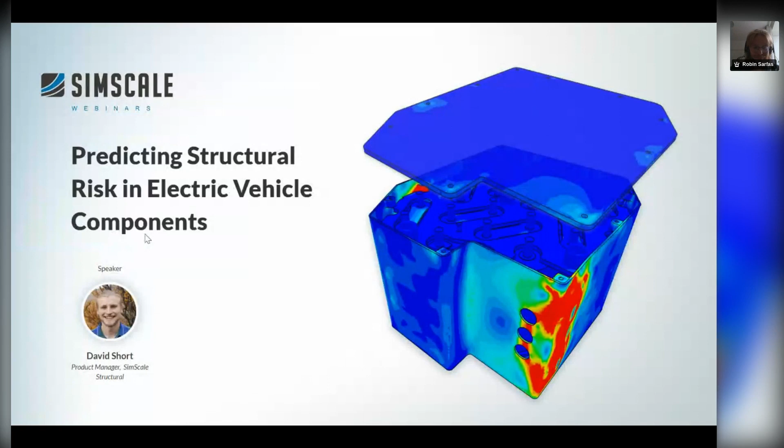Thanks so much, Robin, and welcome everybody. As Robin mentioned, I'm the product manager of SimScale. I'm hoping a number of you already know SimScale, and you'll be getting to know a few particular applications that we're really focusing on at the moment in the electric vehicle industry. For those of you who are new to SimScale, I'll also introduce SimScale, the main concept, and then we'll see the focus of today's webinar.

So today's webinar, we are going to be looking at predicting structural risk in EV components.

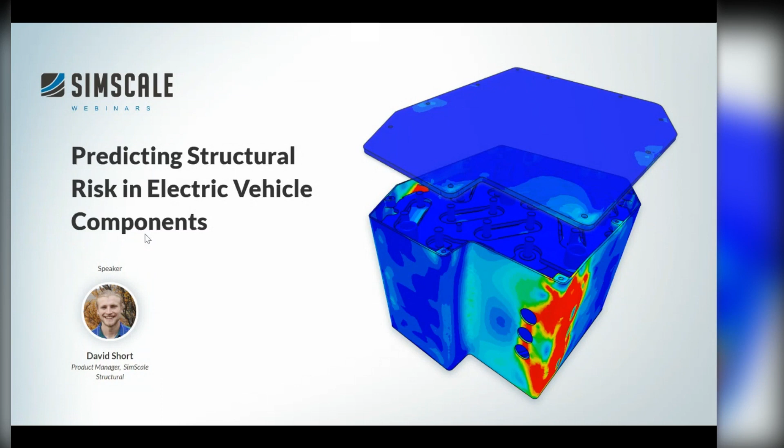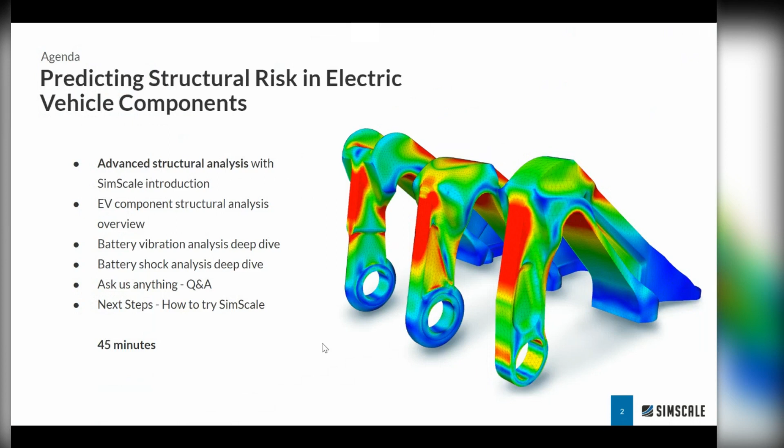In terms of an agenda, we will first look at advanced structural analysis with SimScale. That's really what we're focusing on here, and then we'll get into some specific industry relevant applications, and we'll do a deep dive into battery vibration and shock analysis using cloud native parallel computational finite element analysis. If you do have any questions at any point, please do type them into the question chat, and Robin will ask me the questions at the end. So please reach out if you have any questions or comments to discuss.

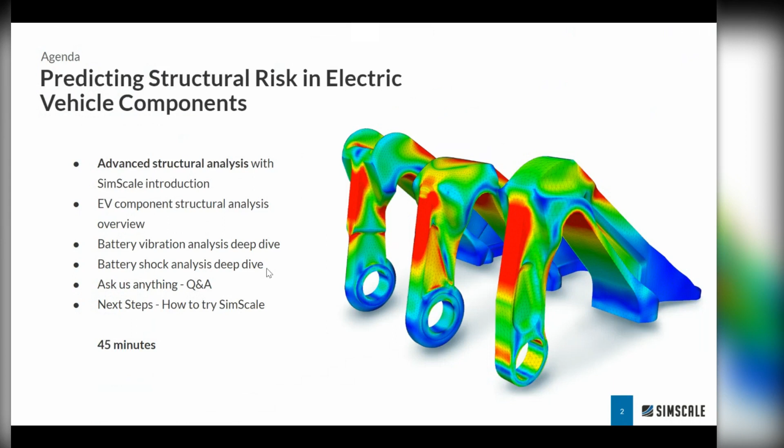SimScale is all about making advanced structural analysis truly accessible. The way we do that is we provide a 100% cloud native simulation platform. That means it's web browser based, and everything you're doing in terms of the simulation computation is running in remote servers. That means we are not connected to your local hardware in any way, and it means you can scale your simulations both in terms of the number of simulations you want to run in parallel, and the size of the models that you want to run as well.

So for a smaller mesh, we'll be running on a smaller machine, and for a larger mesh and a more complex case, for example a dynamic simulation, we'll be running on a much larger instance with more storage and higher compute power. It really is just one platform where we have all of our physics in one streamlined and intuitive workflow. So you'll have fluid analysis, thermal analysis, structural analysis, all in the same environment. You can really chop and change. Once you've learned one simulation type in SimScale, you might be able to jump into fluid analysis, for example.

Take an electric motor, for example. You might want to do the pressure drop and the thermal distribution of the cooling channels using CFD analysis. And then you might want to extend that into a thermomechanical structural simulation using what I'm responsible for, the advanced structural analysis tools that we have on offer.

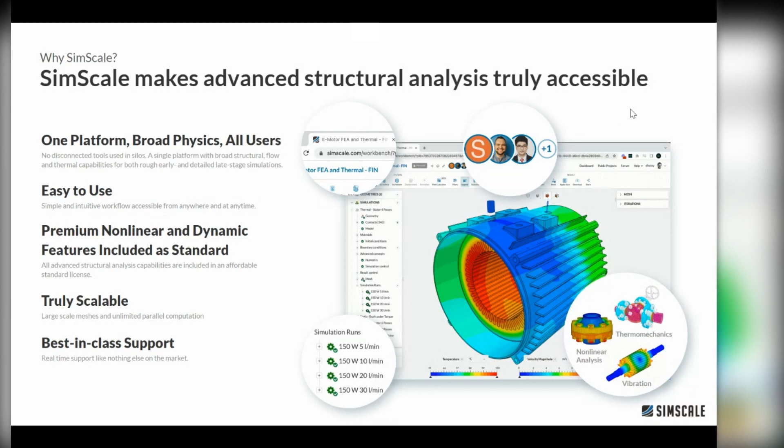So for those of you who are new to simulation and are looking to dip your toe in the water, what does simulation really bring? It brings a number of things.

That's both in terms of design exploration, so low-cost design space exploration. With simulation, you can go really fast through design iterations and make sure you're focusing on the high potential candidates up front. We can disregard the low potential ones that might fail in physical testing before we even get to the prototyping step. Now, exploration also means innovation.

When you're running simulations, it can also show you things that you weren't expecting. You can really start to understand exactly how the structural mechanics behave, how the kinematics of your parts interact with one another, and that kind of detail you just don't get from physical testing.

That's really one of the main benefits, the fact that when we compare against physical testing, you get point-wise data for the whole structure. So you can really detail where the structural risk is and how to mitigate those risks as well. We'll go through an exact application around batteries, and have a look at how that looks like in practice.

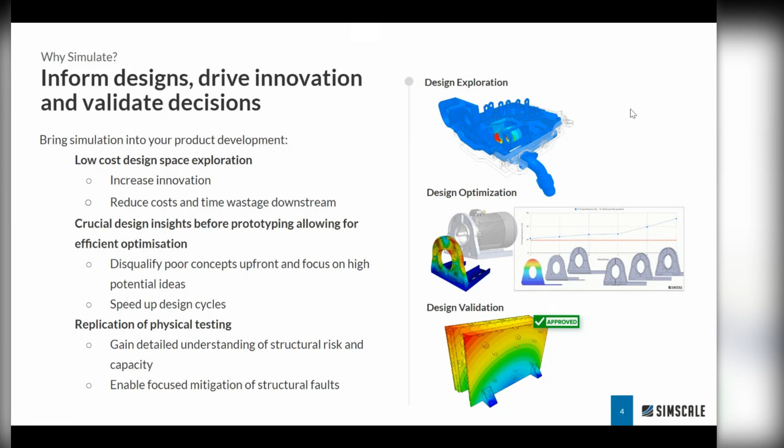In terms of the applications we offer in the advanced structural analysis field, specifically for EV components, we have a lot of customers doing battery module vibration and shock. We also have many customers doing electric motor, rotor and shaft interference fitting.

It may not look like the most complicated simulation, but it really is, because you need to solve this initial penetration, which then shows you the stresses in your rotor cage. You can run that at multiple temperatures to really understand the interference fitting sizing.

You can run it with nonlinear material properties to understand how much plastic or permanent deformation you have in your rotor cage. So you can do a lot of work up front to know exactly what interference fit you need, to establish reasonable contact pressure, and to know where it's going to break, what the actual limit is. So you can do a full sizing before you actually get to prototyping.

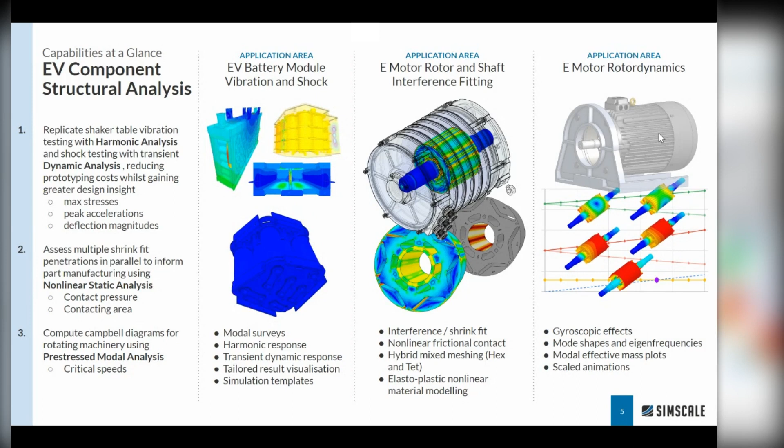Also, on the subject of electric motors, we also offer rotor dynamics. So on modal simulations, we can include the gyroscopic effects, which allows you to understand the rotational eigenfrequencies, and also the effect that the rotational speed will have on those eigenfrequencies. That would allow you to create a Campbell diagram and understand the critical speeds for your application.

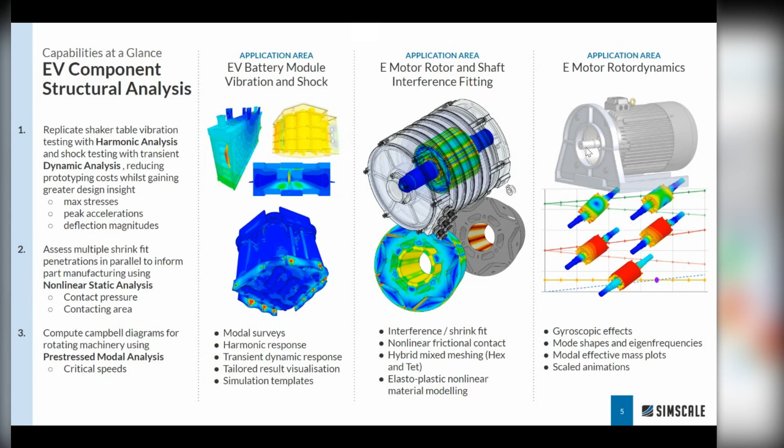So let's get into a real case study. Today we'll look at a battery module assessment. We've taken an electric cargo vehicle here, and we've got the battery unit that we want to simulate and assess. It's a 22-cell EV battery with a gross mass of 46 kilograms.

That places it as a large battery classed under UN and AIS standards. Let's think firstly physically what we need to do with this kind of product. We know that when you've designed the product, it's going to have to go through physical testing, number one, vibration testing on a shaker table, like what's in here.

That shake profile, the level, the amplitude of the oscillations, is set by international standards. That could be MIL standard, UN standards, and many others, ISO for another few.

And then once we've actually had a look, it needs to be able to survive that vibration testing. And we can also replicate that exactly on a simulation front.

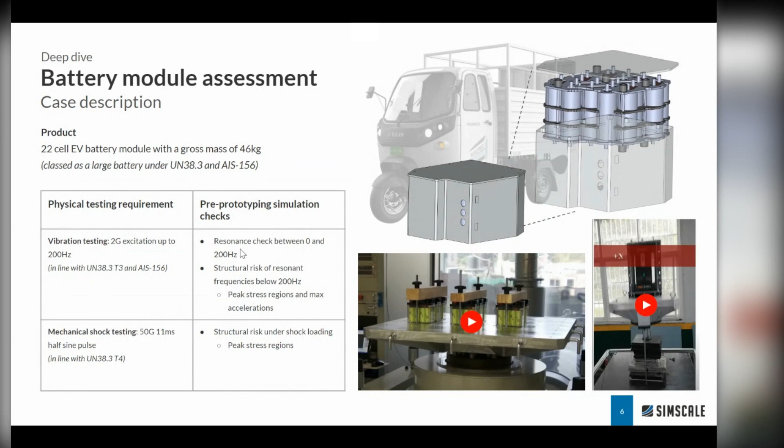So we need to make sure that if we go through with this product, we understand how likely failure is at this critical eigenfrequency. What we can do then is move from a modal analysis into a harmonic analysis, where we run the same scenario but give it a physical shake, just like in the physical test space.

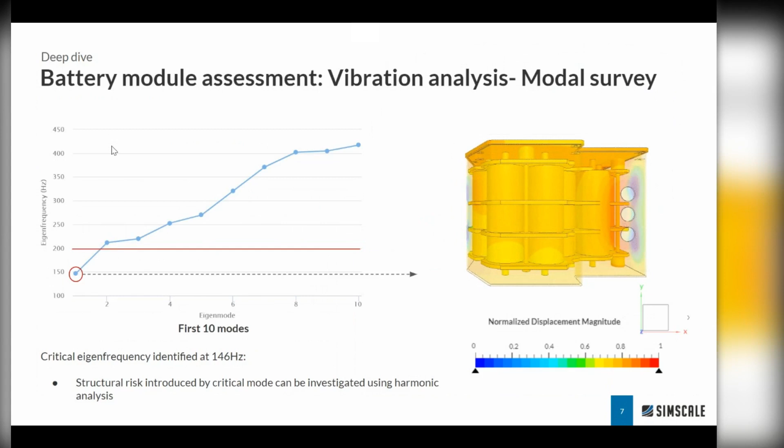What we'll do is input an excitation of 2G, a sinusoidal base excitation in the X direction, really trying to excite this mode of interest. We'll shake it in the X direction, and drive the excitation at frequencies between 140 and 150 hertz, so we capture the peak accelerations and peak stresses of the first mode.

I'm really only focusing on the first mode here. You can also extend a harmonic analysis to look at all the modes, but as we've only got one critical mode of interest, we're just going to look at the mode at 146 hertz, and run 10 frequencies around it so we really capture the peak.

I've added 5% damping to the material in the model. When we go into a dynamic response analysis like this harmonic one, we need to make sure we've also got the physical damping in the model, so that we don't see infinite resonance. If you don't add damping and drive it at a critical frequency, you'll have infinite response, which is definitely not physical.

In SimScale you can easily test at 5% damping, or at 2%, 1%—look at a worst case scenario of 1%, for example. If your product survives that at 1%, you're all good. But here I'm just using a fairly moderate damping value of 5%, that's 5% of the critical damping ratio.

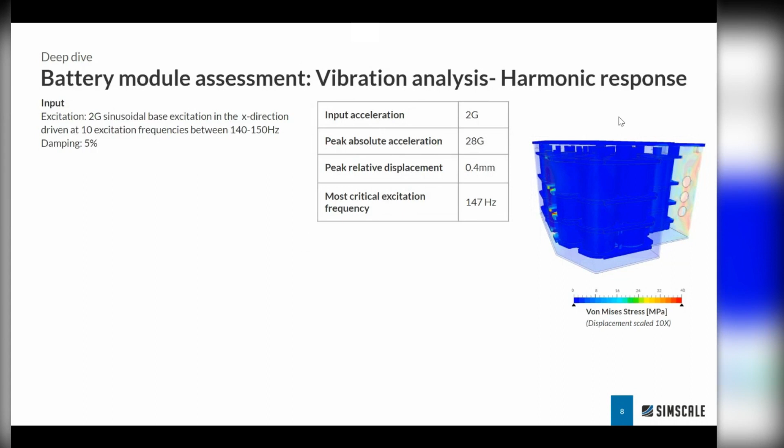Now, if we dig in a little bit deeper, we can see which components are at risk by actually assessing the capacity of those materials and seeing how much yielding we actually have in those components made of different materials.

So anywhere in white, we actually have stresses going above the yield strength of the material. And that's obviously something we want to avoid, right? That's going to lead to permanent deformation. In some cases, it might be acceptable, but generally, we're looking at safety factors of a minimum of 2, really, so half of the yield strength, right? So this is already pretty dangerous territory that we see for all of these components.

We have some pretty large areas of yielding for the PVC holders. The copper bus bars are getting close to yield, but they're not completely at yield.

So the peak stresses were at 21 megapascals, and the yield is at 30 megapascals, and that's a minimum safety factor of 1.4. So still, that's dangerous territory, and it depends from company to company, from standard to standard, but we like to be designing at minimum safety factors much higher than that.

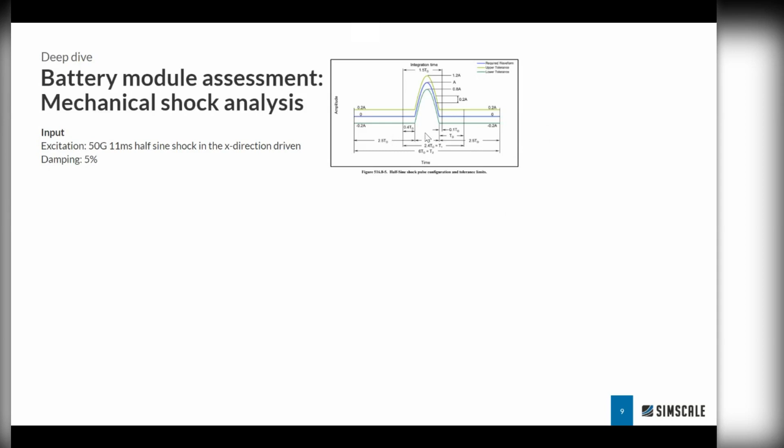And what we want to make sure is that we're replicating this half sine shock profile that is stipulated by many international standards, right? So that could be the DO-160G for aerospace and airborne electronics components, or MIL standard in the US, and also the UN 38.3 T4 testing standard as well. So we're replicating this exact profile, and we're hitting the same battery module with this profile.

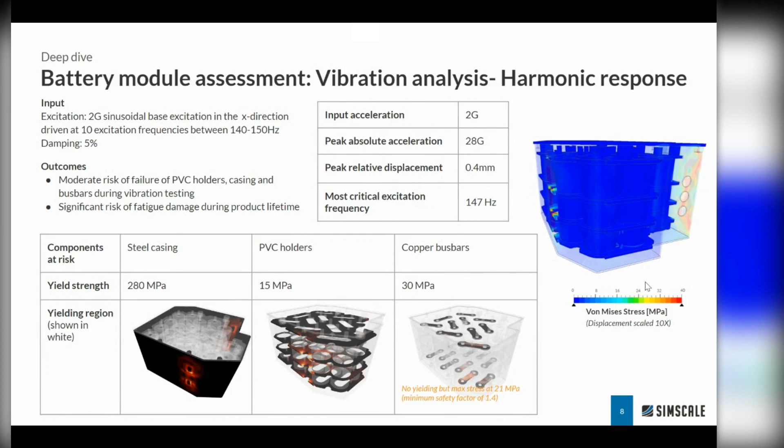And there we can see here, I've used the same scale. If I just go back a second, we don't see a huge amount of peak stress areas outside of these sort of on the PVC holders. But when we go to the shock analysis, there we see a considerable amount of stress being carried in both the support structures throughout the PVC holders, and a lot in the case as well.

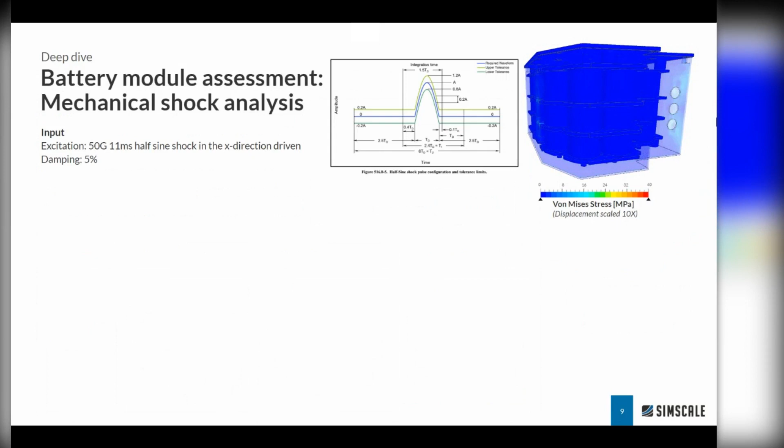So digging into the results, just like we did for the vibration analysis, we see significant yielding for all three of the components that we consider to be at risk, even for the vibration test. Looking at the steel casing, we see significantly more yielding than we saw in the vibration analysis. The same goes for the PVC holder, where significant yielding is drawn into the center of the holders as well. And again, for the copper bus bars as well, there we see stresses going above yield strength on these components.

So as an outcome here, we see significant risk of failure of all three of these components, and we haven't even looked at the support bars as well. But at this point, it's pretty safe to say that this design candidate is not going to pass our shock testing, not without experiencing a significant amount of permanent damage.

So let me show you what that looks like in the platform itself. I'll bring SimScale into the picture now. I'm hoping you can all see my screen here. You'll see that SimScale is purely web-based, accessing the software directly through my browser.

That means it's accessible from anywhere, at any time. And because the simulations run not on your local machines but on remote servers or cloud instances, your simulations can scale as well, dependent on the model size.

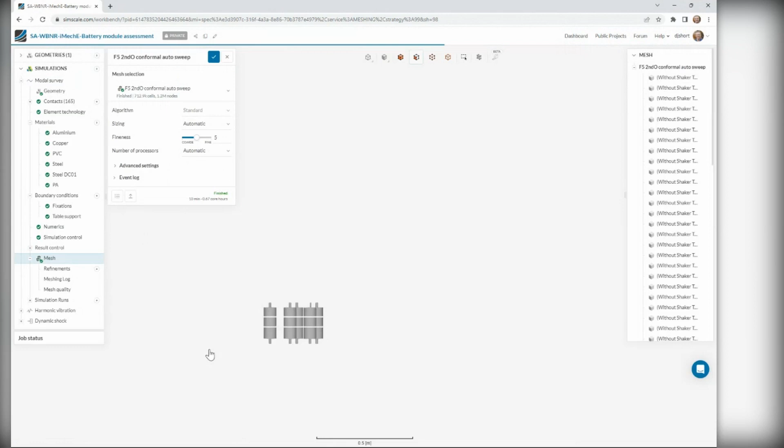So here we've got a mesh size of 1.2 million nodes. We're going to be running this on a fairly large machine to make sure we have an efficient solution. But I won't get straight into meshing—no one wants to go straight into meshing. We'll talk about that in a bit. Back to the SimScale platform itself: it can be accessed from anywhere, at any time, and at any scale.

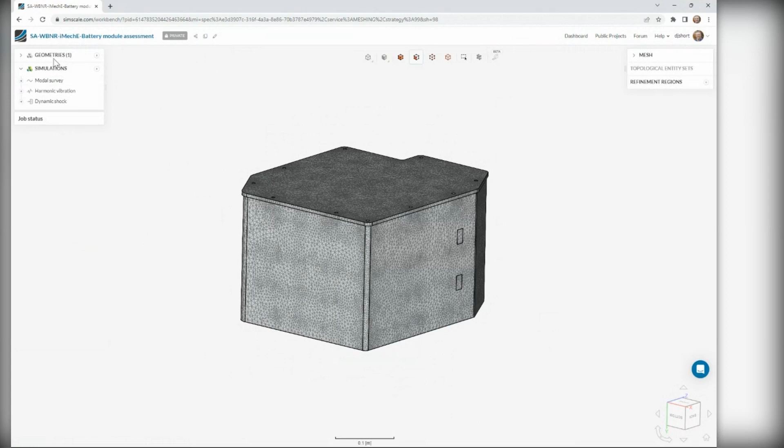What you need to do is bring in your geometry from a CAD tool, be it Onshape, Inventor, SolidWorks, wherever—we'll read any CAD files you give us. You bring it into SimScale, and you can edit the CAD to get it ready for simulation, for example deleting surfaces or creating fluid volumes for CFD. We've got our own CAD tools as well.

Then you go to starting your simulation. You'll notice I've got three simulations here: the modal survey, the vibration testing, and the shock testing. What's quite nice is you've got your full project in one place with multiple simulations, with multiple runs underneath them, and all of that can be running at the same time.

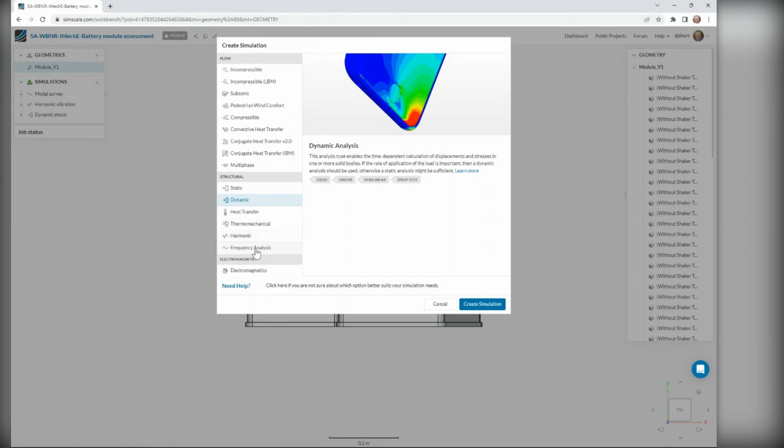So what I've done is gone in and created, from our simulation library, a modal analysis, a frequency analysis, a harmonic analysis, and also a dynamic analysis. If we look quickly at the setup for a modal analysis, you can see that in action.

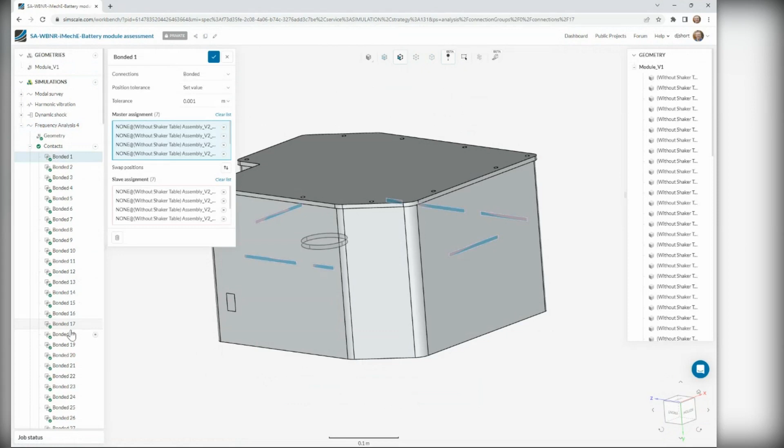Let me just create a new one. The first thing it will do is automatically detect the contacts within the model, and then you can go through and check out all of your contacts. You add your materials either from our default library, your own user materials, custom materials, or through a company library as well.

Then you'll be setting up your boundary conditions, which is the physics of the problem. There's a lot of automation going on, but you can manually refine or customize any of the settings we offer. By default we take care of the numerics, the simulation control, and the element technology, but you can always go in and adapt those to your applications or previous experience.

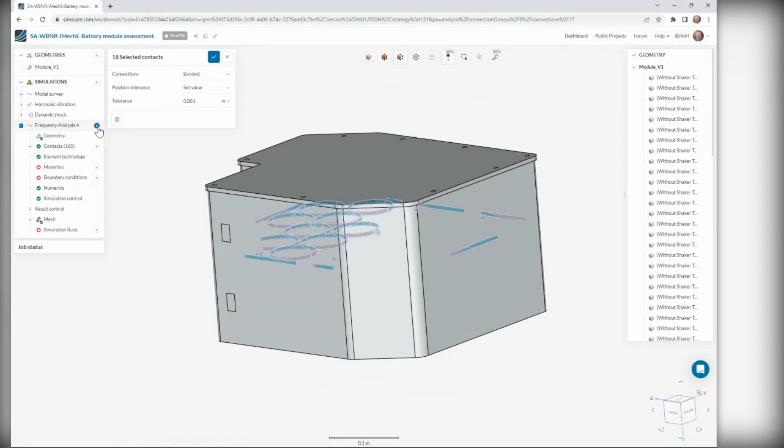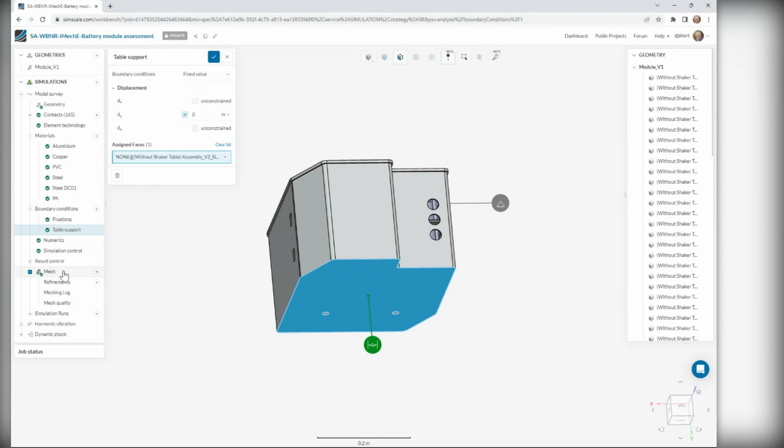So let me delete that. I've run the modal analysis with these materials, just basic linear materials for a modal analysis—it's a linear simulation. Then I've added some boundary conditions: fixations where the product is clamped during vibration and shock testing, and some constraint on the base where it's connected to the table. I've used automatic meshing in this case.

Just a fineness of 5 giving us our 1.2 million node mesh. We offer both tetrahedral element meshing as well as hexahedral and prismatic elements, first and second order.

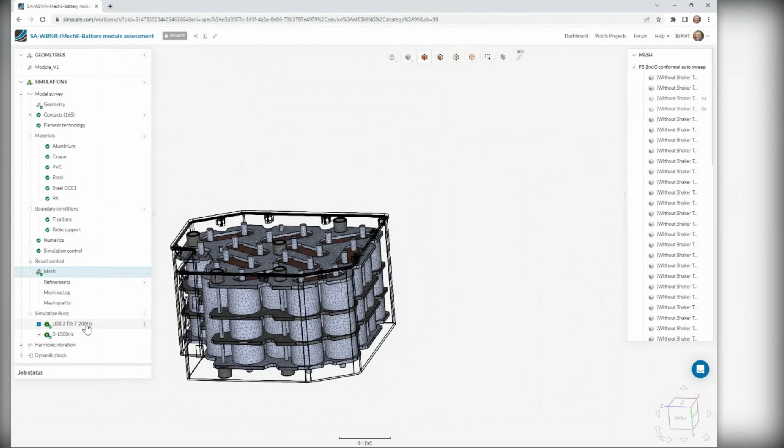Then we can run our simulation. I've run one specifically within the range of the UN 38.3 T3 test phase, but I've also run one from 0 to 1000 hertz just to really capture and understand what's happening with all of the modes of interest.

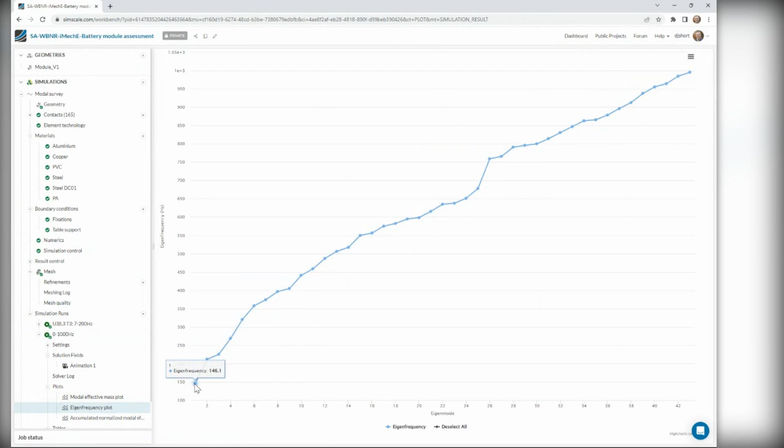So from here you can see your eigenfrequency plot going up to the 43rd mode at nearly 1000 hertz, and our first mode, our critical dangerous mode, is at 146 hertz, which we've already had a quick look at. You can animate these simulation results, and go in and adapt or customize your result outputs as well.

Now let's do something a little bit more interesting and set off some simulations. So we've got our harmonic vibration analysis—we've already gone through the sort of design outcomes of this analysis.

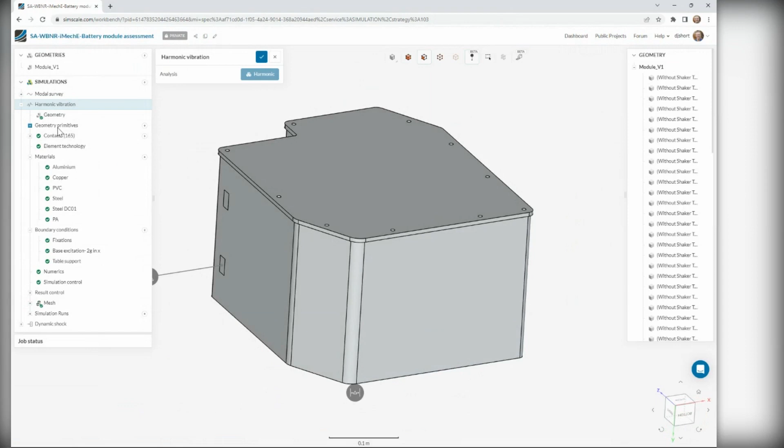The setup is exactly the same as the modal analysis, except we add a physical base excitation in the X direction here. Now I can also change this and say I want to actually have my base excitation in the Y direction. Now we'll go with the X direction because we don't want to shake it into the...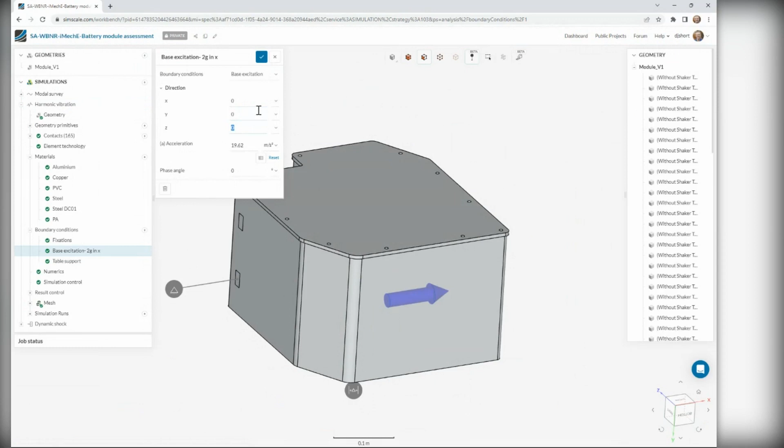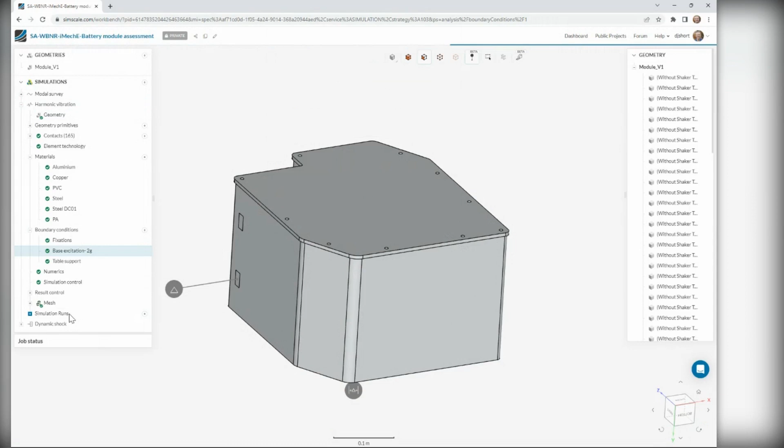Any of them will be fine. We can do both. So let's now say this is base excitation, just call it 2G for now, and we'll do it in the Z direction. So then I can start a simulation here. We go 2G in Z, and we set off that simulation. That will jump off into the cloud, and the simulation will get started. And what we can also do is we can set up another simulation.

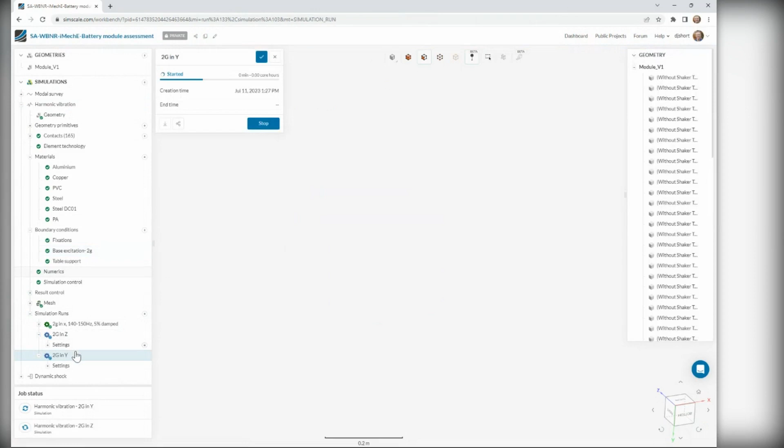Hit it with another 2G in Y. We'll see that these simulations are sent into the cloud. Well, everything's in the cloud, right? We're setting up the problem in the cloud as well. But these simulations will then run in parallel.

Now that's a huge advantage when it comes to these slightly longer simulations, particularly with shock analysis as well, where we know within our international standards, we have to do 3-directional shock testing. We need to do a half-sine pulse in the X direction, the Y direction, and the Z direction. With SimScale, we can run all of those at the same time, whereas with a local machine, you might need to wait for one to finish before you start the next one, and so on. So that's a huge advantage to using a cloud-native solution.

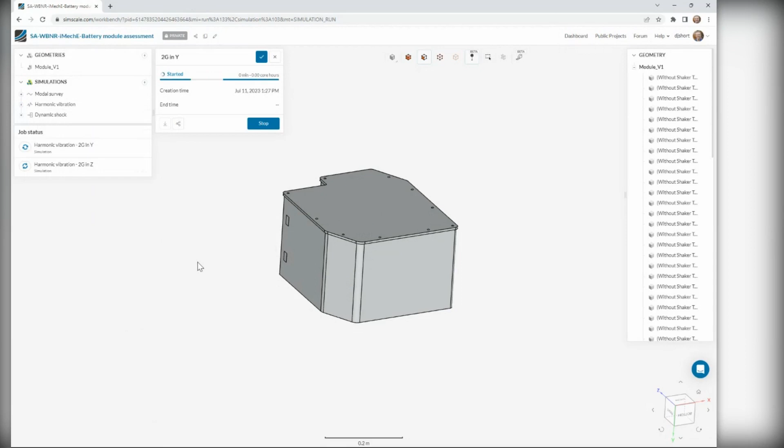Okay, so there were a few insights of how SimScale looks like. Hopefully you've got a bit of a feel for what we're all about.

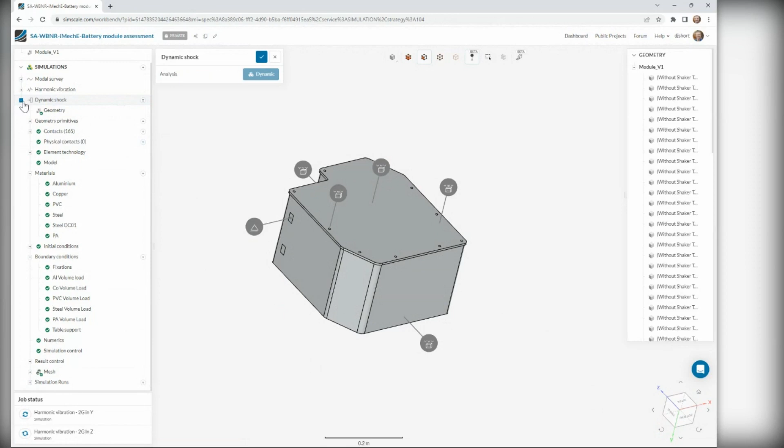Do we need to look at the dynamic analysis? No, I want to wrap it up a little bit so that we've finished it in half an hour, and then there's going to be some time for questions. Yeah, you've now got an impression of what SimScale is all about. And let me jump back to the slides.

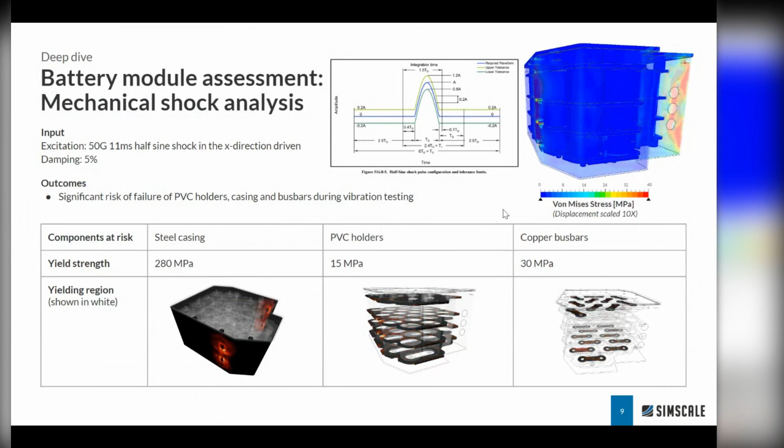Okay, so in summary, with our deep dive investigation of this EV battery unit, we can see that the simulations have highlighted significant risk for the steel casing, for the PVC holders, and the copper bus bars, both in vibration testing and also in the mechanical shock testing.

So what's great now is we can disqualify this design before even going to prototyping. So we're not going to waste any money on a physical test that we know the product will fail, right? And what's always surprising for our customers is that one physical test of an EV battery costs more than a SimScale license. So you can have huge cost savings by just doing simulation up front, making sure that you're disqualifying poor designs, and actually you've got the detail as well to mitigate those poor designs and understand what's going wrong, how we can change it, and what we can do as a next iteration.

So it's really simulation-driven design. And with the complete detail of the stress and deformation, we can pinpoint those areas of risk, and check for the clearance issues. So remember, we can easily show which components are deforming the most, and whether or not that's going to cause noise issues, which is obviously a huge problem in the EV world. Everyone wants a very quiet EV. And so the more detail you can have there, the more satisfied your customer is going to be.

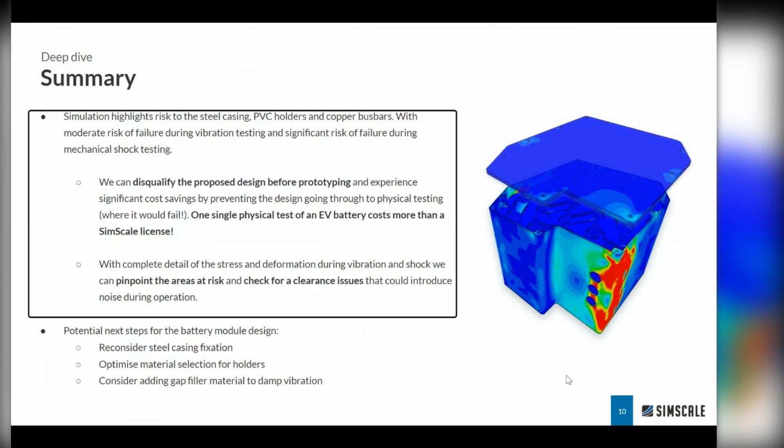So I've highlighted a few potential next steps for the battery module's design. We can reconsider the steel casing fixation, because we saw a lot of stress building up around those fixation areas. Now, some of that will be stress concentration or stress singularities due to the boundary condition, but there was quite a region of peak stress around those fixations as well. So we could think of a different clamping strategy, for example. That could be one simple step to improve this design.

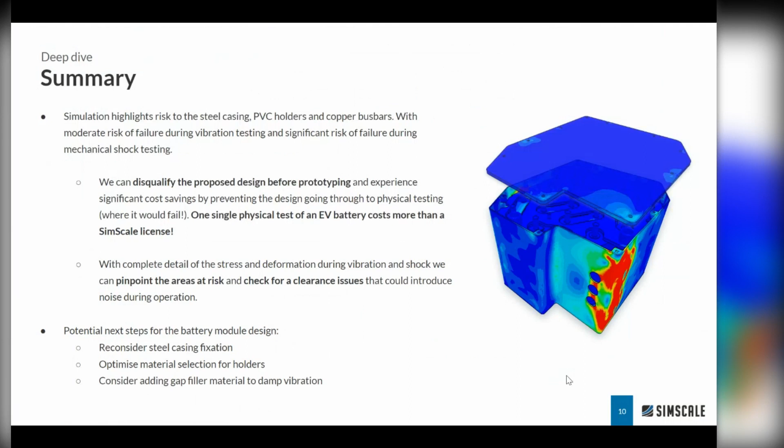We can optimize material selection, so maybe use a slightly stiffer material or a softer material, and see how that will affect the peak stresses in the PVC holders, for example, in the copper bus bars. And we can also consider adding maybe some more innovative things like gap filler material, right? The sort of foam that you can press into tight spaces to damp out vibration, or different types of rubbers that you can use to actually damp out any vibration and reduce those peak stresses as well. Okay, so I hope that was interesting. I've had you here for 30 minutes or so.